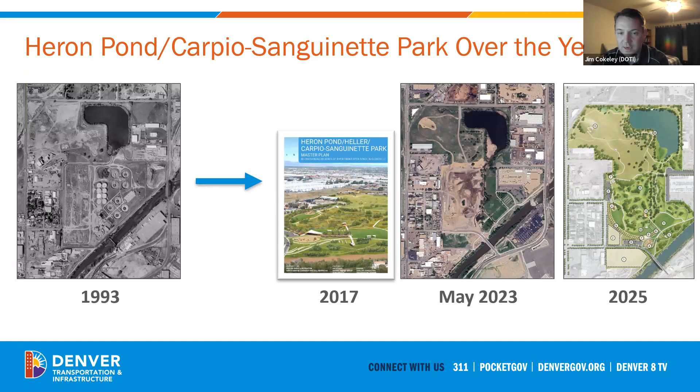So you can see here, back in 1993, it was a wastewater treatment plant, shown in black and white. Then moving forward, we did the master plan back in 2017. The next picture shows pretty close to where we're at right now. We've been doing the infrastructure work, the grading, the pipe works, getting the site ready to actually build the park. The final picture shows how the park is going to be laid out, consistent with the master plan.

We've completed phase 1A as of a little over a year ago, that's the red wedge along the river on the east side of the site. We improved the levee, part of 3 phases of the project to get our FEMA levee to protect the neighborhood from the river flowing back into the city.

That was $2.8 million. We're mostly complete with phase 1B. We just got an extension through June from our contractor. That was $20 million for all of the infrastructure, the roadways, the parking lots, the pipes, a lot of earthwork, hauling off the dirt, and dealing with a lot of the site conditions, setting us up for phase 2, which will be the amazing park, beginning in June and continuing for approximately a year. Then we'll have the park opened in 2025, which is pretty exciting to see this thing come to fruition.

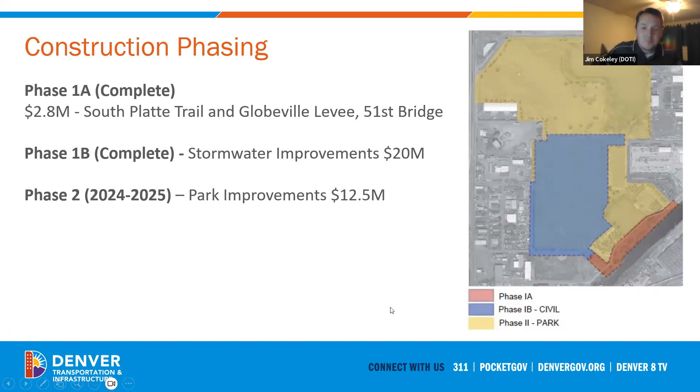Here's the site. We finished the grading in the spring. We hauled off over 10,000 large trucks, the big haul trucks, just hauling dirt out of the pond area itself. We added the stormwater outlet structures.

These are meant to hold the water back in a decent storm event. It'll come in there and slow the water down, and that helps take a lot of the pollutants out of the water, which can actually just be fertilizer from your lawn, before it goes to Heron Pond and then on its way to the river.

There are 2 forebays, and we'll see those as we fly through. One's under construction now, and the smaller one at 52nd is complete. Those help catch the sediment that may be in the stormwater, the heavy dirt and stuff picked up in the water, to keep sediment from going into the pond area itself.

We have the trash vault completed as well, to catch large trash bags and stuff as it enters on the south end. The sanitary sewer and water line is complete, which will help feed the rest area that comes with the park.

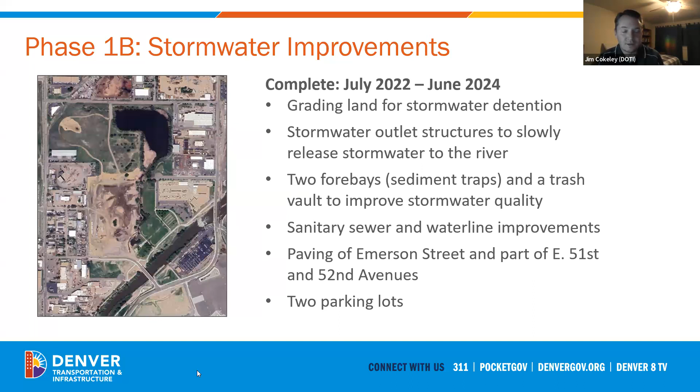The paving for the 2 streets, 51st and Emerson Street, has been completely rebuilt, as well as parking lots near 52nd and Emerson, and 51st Avenue at the main park entrance. They're going to be great. I'm pretty impressed by them.

Moving on, here we did a fly through starting over. You're at 52nd and Emerson, looking north towards the Heller property, the northern half of the site. So we'll fly right here.

We're going to zoom in and off up to the left. You can kind of see the structure up there. There's going to be an overlook structure there for bird viewing, and the trail that runs up there. This is pretty fantastic. It's a 2-story structure to check out the birds and overlook the area.

We leave a lot of this open. There are conservation easements over this area, so we can't do a lot of work here, just trail work. Now we're jumping into the north end of the pond area.

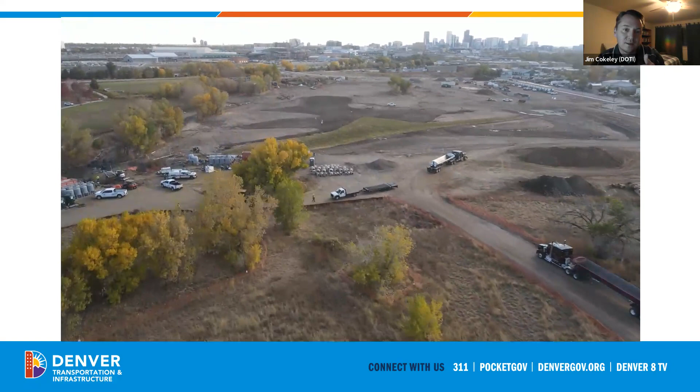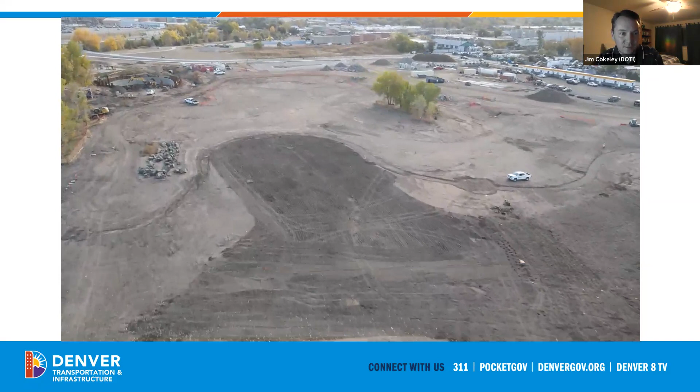You can see the brand new wetland sod that'll help establish and take the heavy standing water. Off to the left was the forebay, I just missed it. And then here we're in the pond, the main parking lot off to the left, and then the staging area for the contractors right off to the left there.

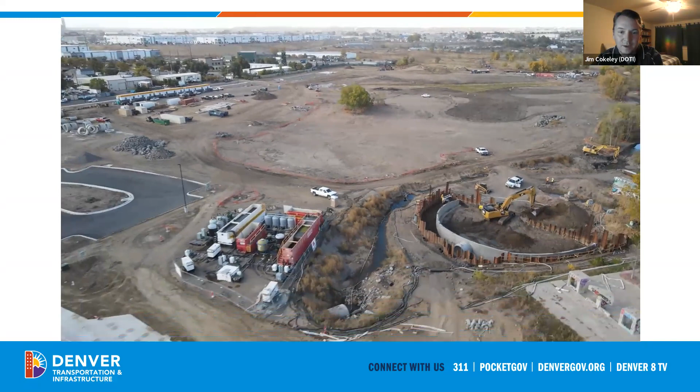Here we can see the main forebay, that's going to be huge. And then the parking lot off to the left, that's going to be the main entrance. It doesn't look like much.

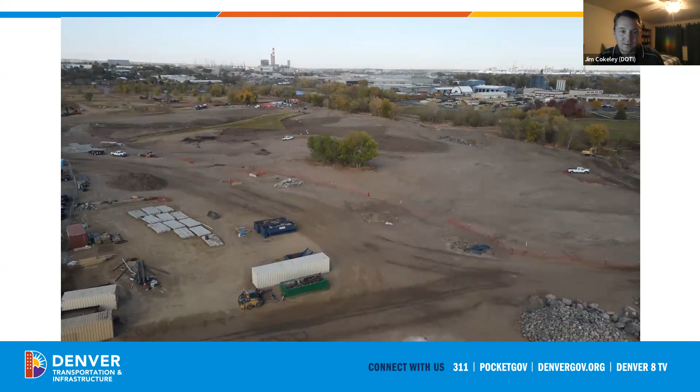The grass is going to be coming in here in the fall with dormant seeding, and then it'll start coming up in the spring. That's part of why our contractor is hanging on a little bit longer. They want to plant the seeds and then walk away from the site, so they're going to make sure we get this established.

Hanging on right here, we're looping. There is a channel that runs from the parking lot all the way up to Heron Pond, and the existing graffiti walls that are out there. There's a perched area, and we're going to be building a structure.

That's going to be taking place over the next couple of months, so you're going to be able to walk over that channel that does carry constant water. So that's underway as well.

Our contractor, like I said, will be finishing in June, but the bulk of the big improvements have been completed. Just some trail work, that structure, and some striping coming here in the next couple weeks. But by and large, the bulk of the work has been done.

Coming in 2024 and 25, we are putting the bid package together right now to get our next contractor on the books in early 2024. They will complete the trails and the nature overlook. The play structures will go in, and this is going to be fantastic.

I was reminded by Catherine when we were starting, this will be, I believe, the 4th largest park in Denver, so it's going to be a pretty amazing amenity. A lot of the habitat items I mentioned before, but there will be so many more for the natural wildlife, aviary birds, and little critters out there too. It's amazing what we see out there from week to week.

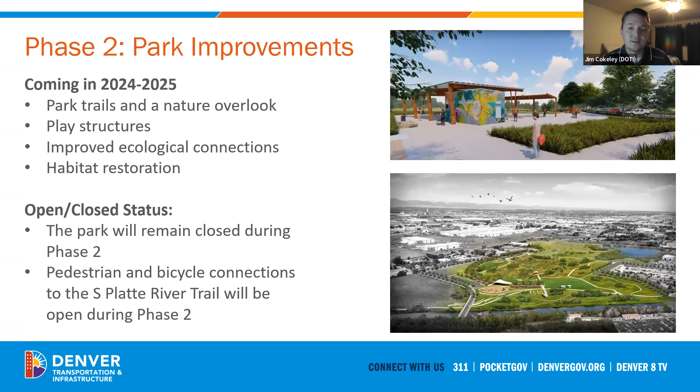So this is just a high level of where we're at. Coming up in December, we're wrapping up our main construction for 2024, getting our next contractor out there in 2025, opening this thing up, and I'll be out there with my kid to check it out too. So pretty exciting.

Here's just the last context. If you have any questions, you can reach out to me or go to the project website. There is a really amazing rendering in a YouTube video that our landscape consultant, Dig Studios, put together. It's really great, and you can see, instead of just the dirt and the parking lots and the pond features that unfortunately I get too excited about and covered too much in this meeting, it'll show you a lot of the amazing park amenities. There's going to be a massive butterfly for the kids to climb up into, slides, all kinds of park features. It's going to be an amazing park.

So with that, if there are any questions, I'm happy to take those. Otherwise, I'll just listen in. Any questions from any of the CAG attendees?

Hi, I have a quick question. My name is Giovanni. Jim, thank you. This is just fantastic. Will you be able to share this slide deck?

Hey, yeah, I'll be sending a follow-up email out tomorrow or Monday at the latest with the meeting recordings and the slide deck. Thank you.

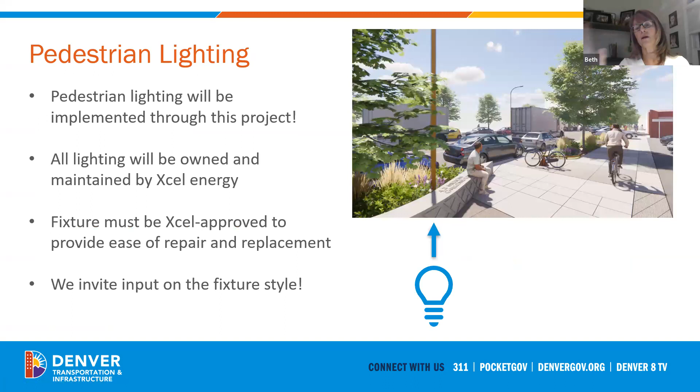Just take a moment. And remember, if you go back, go back to the picture too. There's a lot going on in the streetscape, so you can see that notion of the big overarching lights along the corridor. These are just the opportunities to build in a more pedestrian-scale kind of lighting. It may not be the most beautiful light you've ever seen, but it's all owned and maintained by Xcel, so it's a big win to be able to have that much lighting on the corridor.

It looks like B is his favorite. Preferred, yeah, I think that's where the design team was too. So that's great, yeah, so good.

We're going to talk about a survey that's going out as well, so we'll get to that. I think Giovanni has his hand raised. Oh yeah, please go ahead, Giovanni.

Yeah, thanks. First off, this is all great, really good news about the lighting with Xcel. That is a true real win. I'm wondering if there will be any opportunities to coordinate on a per-building basis.

I think some of you may know we're working on a large project on Washington Street. Naturally, we want to be somewhat involved with what's going to be in front of the building. We're going to be basically an entire city block. I'm wondering if there will be structures at the bus stops throughout Washington Street, or if it will just be signage and a bench, or what that scenario will be.

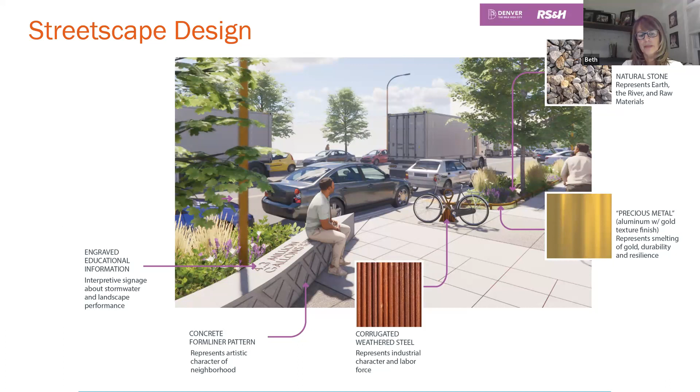All right, so let's wrap this one up. We did have all these materials for you last time, and we haven't been having huge attendance at these meetings, so we want to make sure everybody gets a chance to weigh in or share some thoughts. We've developed a survey, and it's at this location, but it also went out in an email from Chris Callanan, so there should be a link in your email to the survey, but of course we can drop this in the chat as well. We'd love for everyone to fill this out. It just kind of validates whether you liked the look or feel of things, and helps us shape the character of this corridor as we finalize these last pieces of design. So we'd love for everyone to do that and share it with your neighbors, and see if we can get some input that way as well.

All right, so that's really it as far as our update tonight. The last pieces are moving along. We expect to see you maybe in February with final design, everything all dialed in. And if you have particular comments or questions about your property, we can help arrange meetings, and Mark Gonzalez is a great project manager contact as well.

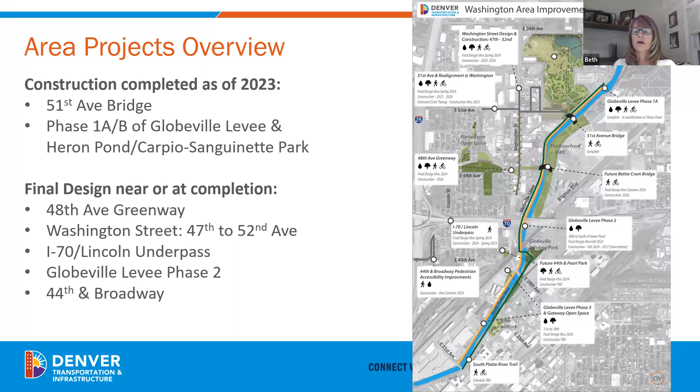There, you can actually read it. So if we start on the north, this map is available now on the Washington Area Program of Projects website.

It's kind of a nice map because even though it's busy, it highlights everything going on, breaks it down so you can see the phases, and highlights the benefits the community is receiving through these projects. For the most part, we're getting stormwater and flood management, trees, green and tree canopy, green space, and bike and pedestrian improvements. They're all hopefully working together to improve the network in this area.

In this case, we have the park, Washington Street, and 51st, which crosses east-west and is being done in coordination with Washington. Mark is also managing that project, and construction will follow in 2025, at the same time as Washington. Then we have the levee, and the conclusion of the 51st Bridge.

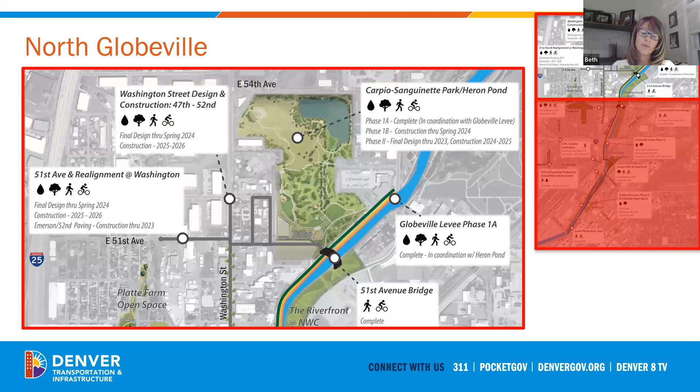Let's go to the next section and dial in a little bit. Here we get into Argo Park, and we have final design of the 48th Avenue Greenway from the outfall at the river west to Washington Street. The secondary portion, which goes west of Washington into Argo Park, is in concept design. It's not that far along, although it's planned as an extension all the way through the park. The first phase is almost at 100%, at 90%.

Future Bettie Cram Bridge is seeking funding. We're going again for some additional grants and trying to pull together money to get that constructed. It's in design right now so it'll be ready to go as soon as the money comes together. We had mentioned the levee, of course.

That's phase 2, and it's the piece you're seeing in this picture. It's also in the final stages of design and scheduled for construction between 2024 and 2027, because they have to work in only the low flow season.

Then we have Lincoln, I-70 and Lincoln Underpass, which is a pedestrian improvement with lighting and safety improvements going in there. Those are slated to move into construction also in 2024, I believe. Those are more near term.

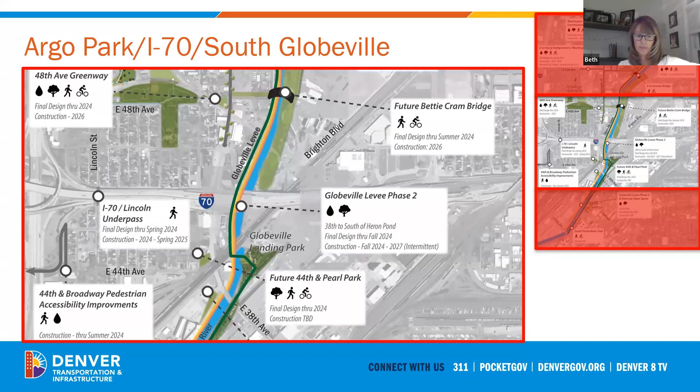Lastly, the 44th and Broadway pedestrian improvements is a ramp and a staircase up and over I-25 to the Fox Station area. That's a great connection between the segments of Globeville that are broken up by I-25.

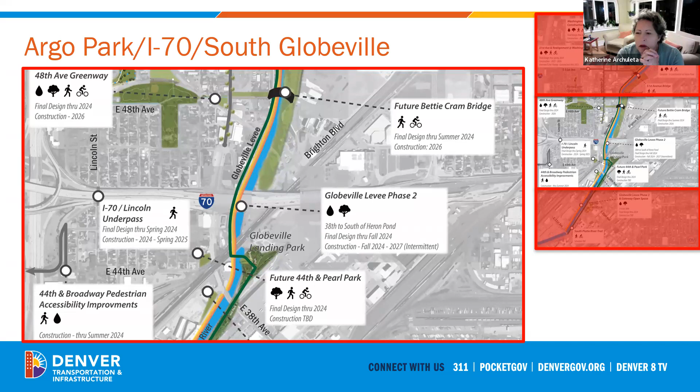And I was just going to mention the 44th and Pearl Park was where the tiny homes were, just to give a sense of context there. Yeah, that's right, that's right.

The last piece near the bottom is that the Globeville Levee has a third phase, running along Ringsby, with a little pocket of open space at the gateway to Ringsby, continuing as a pedestrian improvement along Ringsby with the levee wall. That's the current design, and it's been quiet for a while as they finished up phase 2, but it'll be coming back to life in the next months, looking at that design again.

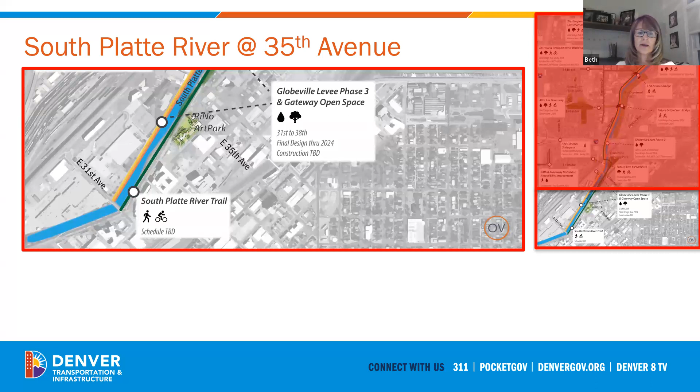Lastly, the South Platte River Trail is an improvement to the regional trail that will go in with the levee improvements. As each phase of the levee goes in, the regional trail improvements go in as well. That's a beautiful trail design that's going to be coming through this area. And that is it on the overarching map.

We've just updated the website, and I draw your attention to it because it was getting a little crazy with all kinds of stuff out there. It's been cleaned up and streamlined. You'll have that map with all the projects visible, plus information about our meetings and quarterly newsletters we're planning to start doing. The individual projects are also listed so you can find out information, and we have nearly all of those updated. Each project manager is providing more current information on their projects, and we're updating those. There could be one or two missing, but we've hit just about all of them at this point. So a big overview for you and lots of great updated info.

Any questions on anything with regard to this?

Don't see any hands up. Beth. All right, great, that's all good news. When you see the list of everything that's being done in sort of a couple sheets, it's pretty amazing. We've been talking about it for the last year, and suddenly all of this is coming together into some pretty wonderful improvements. Thank you for the update.